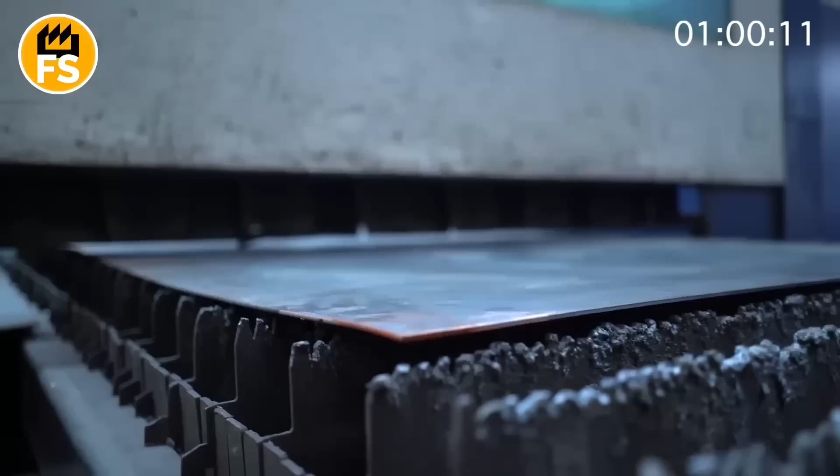Imagine this. Every year, the world produces over 100,000 tons of titanium, a metal that has become a true symbol of innovation and strength in aviation, space, and energy. It's from this metal that the story of creating ultralight and super strong alloys begins, used for manufacturing the most critical parts of airplanes, rockets, and even geothermal equipment.

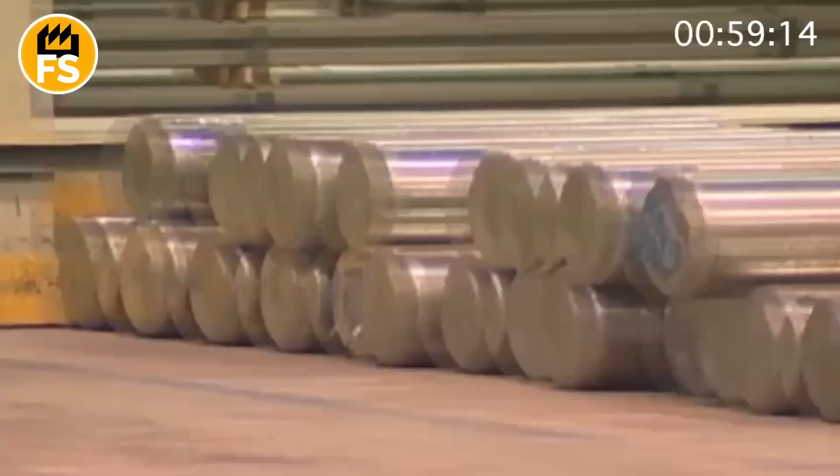In America, where titanium production technologies have reached the highest level, this metal has become indispensable in creating the future, combining lightness with extraordinary strength. Next, I'll tell you how titanium is born, from raw material to a high-tech material that is changing the world.

The history of titanium production begins at the end of the 18th century, when in 1791, a British clergyman and amateur mineralogist, William Gregor, discovered a new metal in the mineral ilmenite, which is now the main source of titanium. Initially, this metal was called menachanite, but later, in 1795, the German chemist Martin Klaproth rediscovered the element in the mineral rutile and named it titanium, in honor of the mythical Titans, giants of ancient Greek mythology.

However, pure metal was first successfully obtained only in 1825 by the Swedish chemist Berzelius, although at that time it was contaminated with impurities and practically unsuitable for industrial use. The first attempts at industrial production of titanium began only in the 20th century.

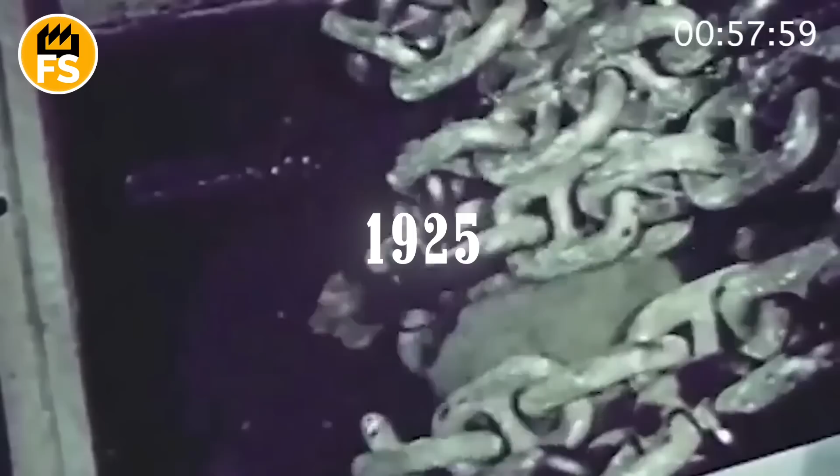In 1910, the American chemist Matthew Hunter obtained a small amount of pure titanium, and a real breakthrough occurred in 1925 when Dutch scientists Van Arkel and de Boer developed a method for obtaining high-purity titanium, which opened the way for its widespread application. From the mid-20th century, titanium production developed intensively, especially in the United States, where the metal became indispensable in aviation, the space industry, and the military industry.

The production of titanium begins with the extraction of titanium-bearing raw materials, mainly the minerals ilmenite and rutile, which contain titanium oxides. These ores are found in the form of placer or primary deposits and are widely distributed throughout the world, particularly in Australia, Canada, China, Norway, and South Africa. After extraction, the ore undergoes complex multi-stage processing.

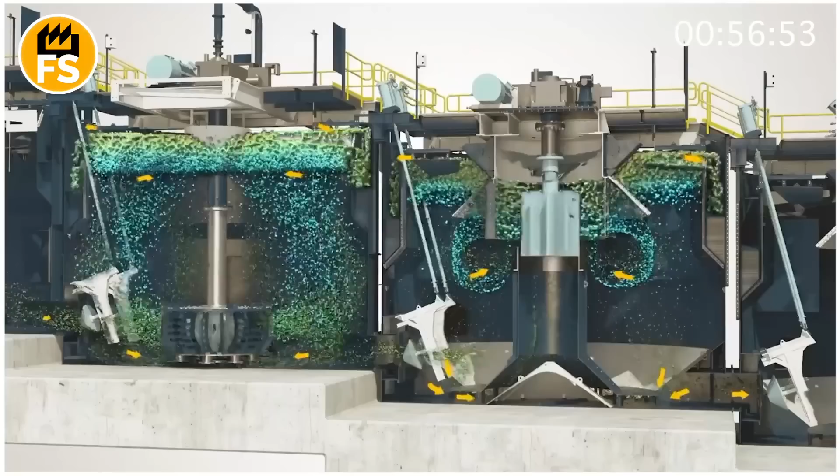First, it is enriched, separating the titanium minerals from the gangue, obtaining ilmenite or rutile concentrates. Then, the concentrates are subjected to chlorination, which results in the formation of titanium tetrachloride, a volatile substance that is purified by distillation. This process allows for the removal of impurities and the production of a high-purity intermediate product.

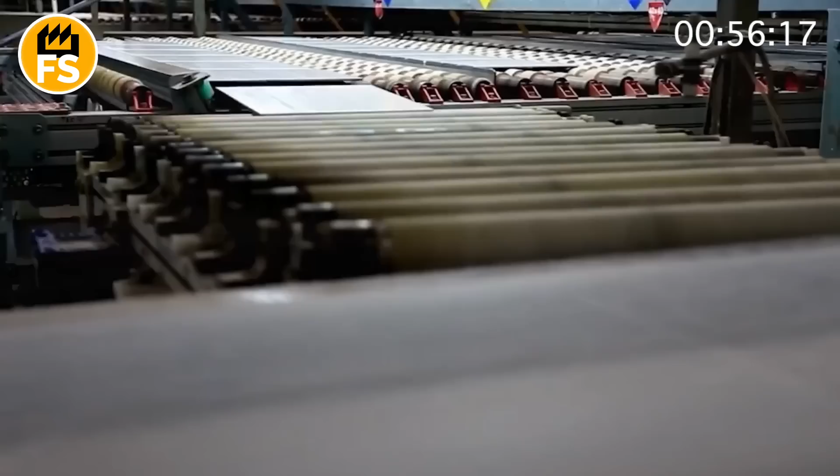Next, titanium tetrachloride is reduced with magnesium or sodium in special reactors at a high temperature in an inert atmosphere, producing spongy titanium, a porous metal powder. This spongy titanium is then subjected to pressing, melting, and casting to obtain ingots or blanks for further processing. The production of titanium is energy-intensive and expensive due to the complexity of technological processes and the need to work in high-purity conditions.

The main industrial method for obtaining titanium is the Kroll process, which remains the standard in the world. It includes chlorination of titanium ore, purification of titanium tetrachloride, and its reduction with a metal, which makes it possible to obtain high-quality metal for aviation, space technology, medicine, and other industries.

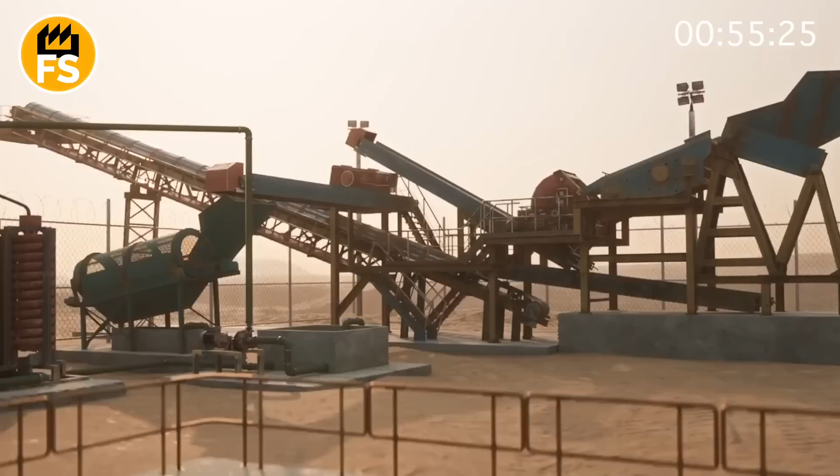Thus, the production of titanium begins with the extraction of ilmenite and rutile, goes through complex chemical reactions and physical processing to transform natural minerals into a high-tech metal that combines lightness, strength, and corrosion resistance. The initial stages of titanium production are based on a complex multi-stage technological process that begins with the extraction and preparation of titanium-bearing raw materials, primarily ilmenite and rutile.

These minerals contain titanium oxides, which must be converted into chemically pure titanium tetrachloride. For this, concentrates of titanium ores are subjected to chlorination in fluidized bed reactors at a temperature of 1,800 degrees Fahrenheit, where carbon and gaseous chlorine react with the raw material, forming titanium tetrachloride and carbon monoxide. This tetrachloride contains impurities of other metals, which are removed by distillation, obtaining high-purity technical titanium tetrachloride.

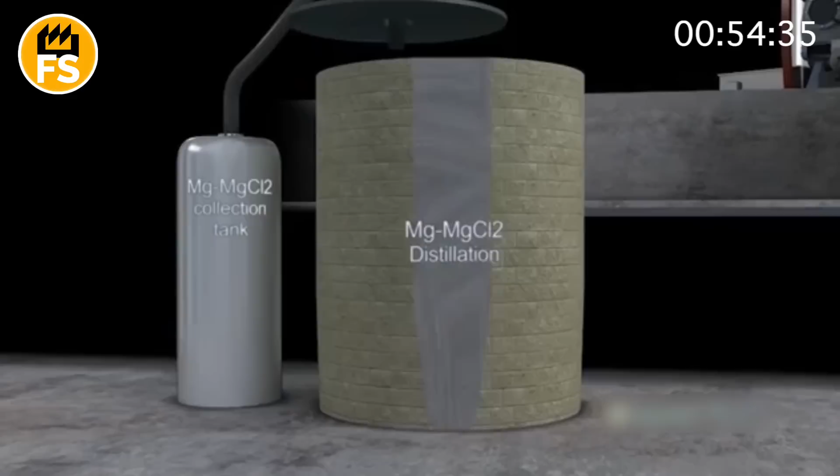The next key stage is the reduction of titanium tetrachloride to metallic titanium. The most common industrial method is the Kroll process, in which titanium tetrachloride reacts with magnesium in a vacuum chamber at a high temperature. As a result, spongy titanium is formed, a porous metal powder that contains impurities of magnesium and magnesium chlorides. This reaction mass is subjected to vacuum distillation to remove impurities, after which the spongy titanium is pressed and remelted into solid ingots or slabs.

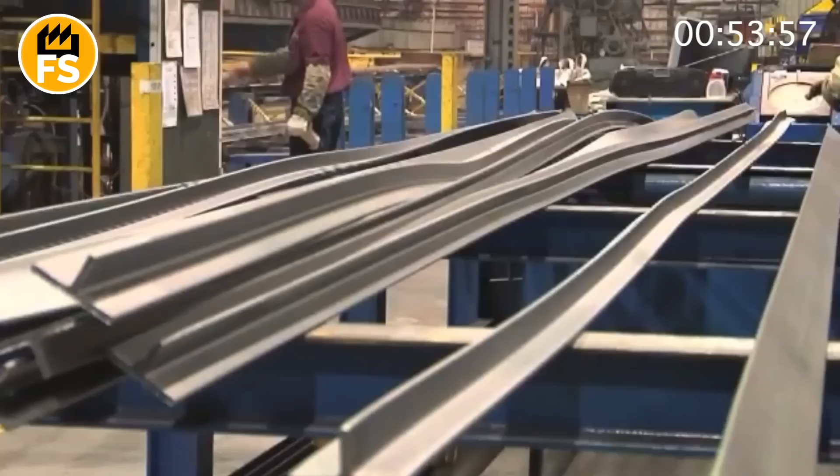The resulting titanium ingots are then used for the production of alloys, rolled products, sheets, and complex parts. The entire process requires strict control of purity, temperature regimes, and safety, as titanium actively reacts with oxygen and nitrogen when heated.

Just look at how incredible it is. A porous, light, and seemingly fluffy mass of metal. This is spongy titanium. It looks nothing like a regular metal bar, but rather like a piece of metal sponge or foam, only made of titanium. But this fluffy material is the first step towards creating strong and reliable titanium ingots, which are then used in aviation, medicine, and other high-tech industries.

First of all, titanium ingots can be used to create titanium alloys, mixtures of titanium with other metals that improve its properties. To obtain an alloy, alloying elements are added to molten titanium, most often aluminum, vanadium, molybdenum, iron, or niobium. These impurities change the metal's structure, increase its strength, heat resistance, corrosion resistance, and improve its processability.

The production of alloys usually takes place in vacuum arc furnaces, where the metal is melted at high temperatures in a protective atmosphere to avoid oxidation. To achieve a homogeneous composition, the alloy is remelted several times, and after that, it is cooled and prepared for further processing.

The next stage is rolling. Ingots or slabs of titanium and titanium alloys are heated to a certain temperature to make the metal more plastic, and passed through special rolls. Rolling allows for reducing the thickness of the metal, giving it the required shape and size, as well as improving its structure and mechanical properties.

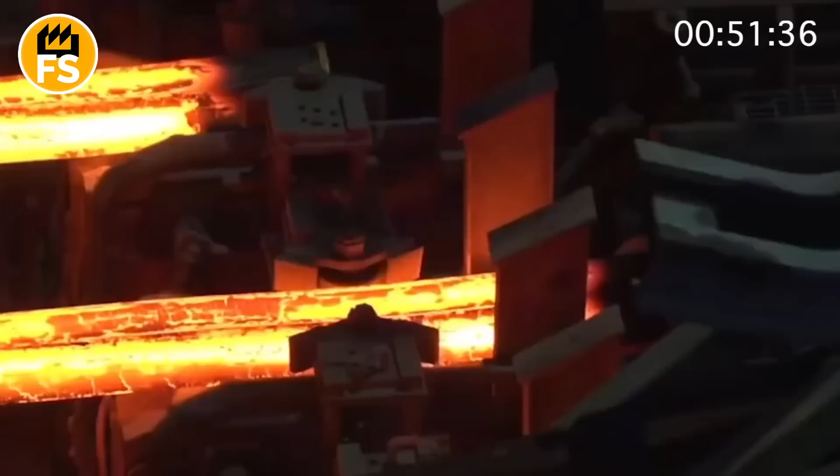As a result, various types of rolled products are obtained: strips, ribbons, wire, and bars. Rolling can be hot or cold, depending on the requirements for the final product. Sheet metal is made from rolled products, thin, flat blanks that are widely used in construction, aviation, medicine, and other industries. Titanium sheets are characterized by high strength and corrosion resistance, and are also easily subjected to further processing: cutting, bending, and stamping. The production of sheets requires precise control of thickness and surface quality, so after rolling, they are often subjected to additional processing, such as polishing or anodizing.

To create complex parts, various methods of processing titanium and titanium alloys are used. These can be mechanical milling, turning, grinding, as well as modern technologies such as additive manufacturing using laser powder bed fusion. Additive technologies allow for the creation of parts with complex geometry that are impossible to produce using traditional methods. This is especially important for the aviation and medical industries, where lightweight, strong, and precise components are needed.

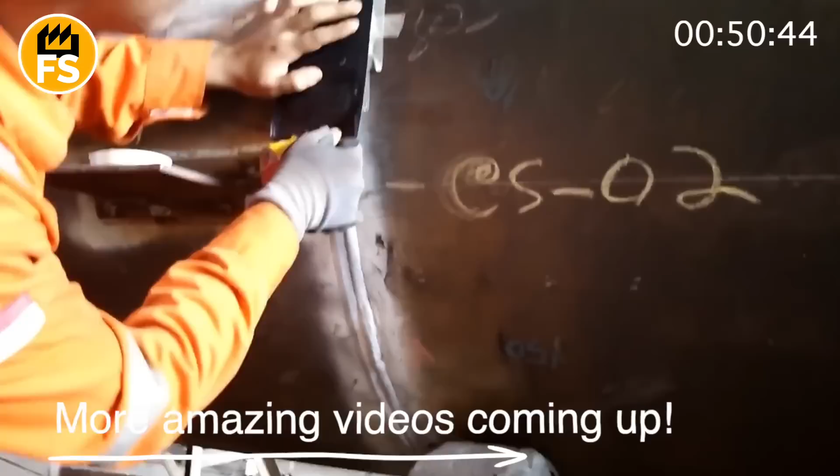In addition, to improve the performance characteristics, titanium products can be subjected to heat treatment: annealing, quenching, or aging. These processes change the internal structure of the metal, improving its strength, hardness, and fatigue resistance. In aviation, titanium makes up 15% of the weight of a modern passenger aircraft, which significantly reduces its overall weight and increases fuel efficiency. In the medical field, about 70% of implants, such as artificial joints and dental prostheses, are made from titanium or its alloys due to their biocompatibility and durability.

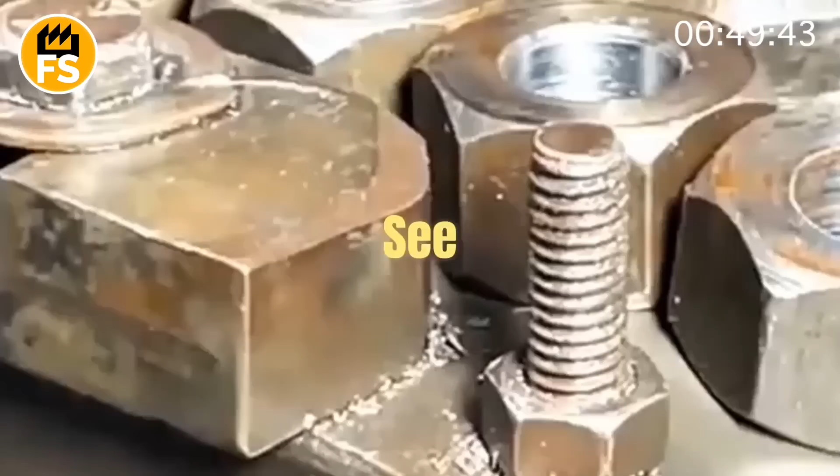A factory for the mass production of bolts and nuts is a high-tech enterprise where metal is transformed into indispensable fasteners used in construction, mechanical engineering, automotive manufacturing, and many other industries. The production of bolts and nuts is a complex, multi-stage process that combines mechanical processing, stamping, heat treatment, quality control, and packaging.

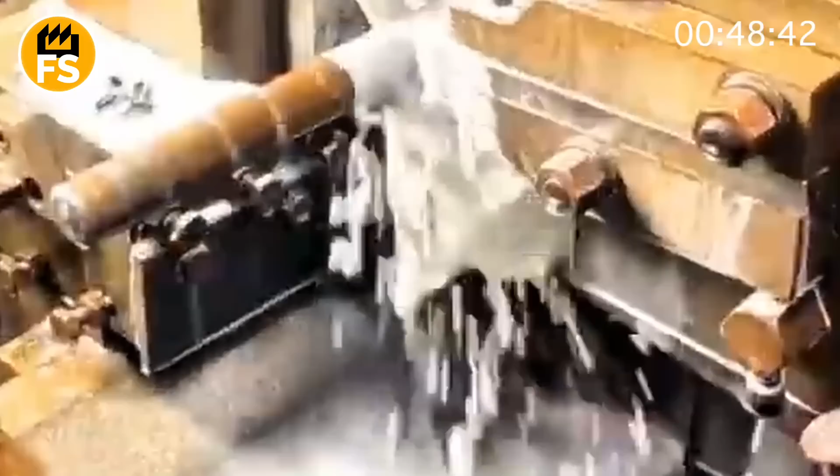The first stage is raw material preparation. High-quality steel wire rod, or bar stock, is used for making bolts and nuts, which undergoes cleaning from rust and contaminants. The most common method is chemical cleaning, specifically pickling in acid solutions, for example, in sulfuric or hydrochloric acid. This process dissolves scale and rust, leaving the metal surface clean and ready for further processing. After acid pickling, the blanks are thoroughly rinsed in fresh water to remove acid residues and then dried.

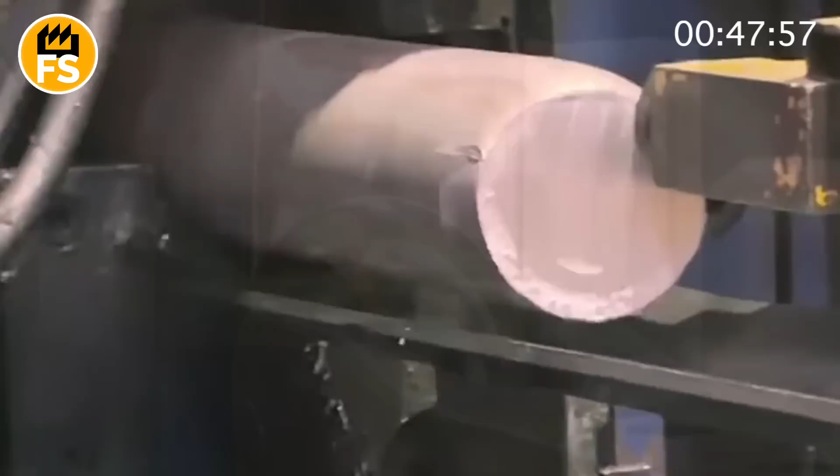For additional cleaning and removal of mechanical contaminants, sandblasting or mechanical grinding is used. Sometimes electrochemical cleaning is also used, which simultaneously evens out the surface and improves corrosion resistance. In large-scale productions, combined cleaning lines are often used, where the metal passes through several stages: mechanical removal of contaminants, chemical pickling, rinsing, and drying. To control the quality of cleaning, visual inspection and special devices that determine the level of surface cleanliness are used. After this, the metal is coated with a protective layer that prevents corrosion during storage and processing.

The main technologies for making bolts are cold heading and turning. Cold heading is a process in which metal blanks are formed under high pressure without heating. The blank passes through a sequence of press dies that give it the shape of a bolt. First, a round base is formed.

Then a head is gradually created, most often hexagonal, which allows the bolt to be tightened with a wrench. Stamping allows for producing bolts with high precision and strength, and also reduces material waste. After forming the head and body of the bolt, the next stage is thread cutting.

The thread is applied by the cold rolling method, where the blank passes between special rollers that form the thread turns without removing metal. This method ensures high thread strength and product durability. In production, speeds of up to 300 bolts per minute can be achieved.

For the production of nuts, hot forging is used. Steel blanks are heated to a temperature of 1,200 degrees Celsius to make the metal plastic, and then under a press, the hexagonal shape of the nut is formed. After this, a hole is punched in the nuts, and an internal thread is cut on special thread cutting machines. Nuts also undergo heat treatment to increase strength and wear resistance.

Heat treatment is an important production stage, including quenching and tempering. Quenching consists of rapidly cooling heated products, which makes the steel hard but brittle. Tempering is the subsequent heating to a moderate temperature, which reduces brittleness while maintaining strength. These processes provide the required strength class for bolts and nuts.

After heat treatment, bolts and nuts undergo thorough quality control. Samples are checked for compliance with dimensions, strength, thread accuracy, and appearance. Micrometers, calipers, and special devices for checking threads are used for measurement. Products that do not meet the standards are rejected or sent for rework.

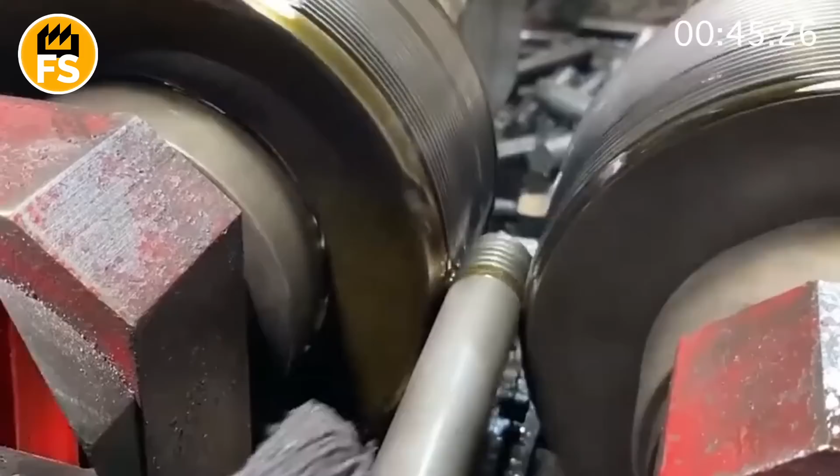To protect against corrosion, bolts and nuts are often coated with anti-corrosion layers, zinc plating, painting, or the application of special coatings. This extends the service life of the products, especially in harsh climatic conditions. Finished bolts and nuts are sorted by size and strength class, packaged in industrial containers, and prepared for shipment. Modern factories are equipped with automated lines that ensure high productivity, hundreds of thousands of products per day.

First, the products are transported along conveyors to automatic sorting machines, which use optical sensors and calipers to determine the size and quality of each bolt or nut. Non-compliant or damaged parts are rejected and sent for rework or disposal. This stage ensures that only products that meet the standards go to the packaging line.

Next, the bolts and nuts go to dispensers that accurately measure the required number of products for each package. These can be small plastic bags, cardboard boxes, or special containers, depending on the customer's requirements and the product's purpose. The packaging is often labeled with information about the size, strength class, manufacturer, and production date.

In some cases, especially for large orders, packaging is done in industrial bags or large containers that facilitate transportation and storage. It is important that the entire process is controlled by automatic systems that ensure the packaging is airtight and protects the products from moisture, dust, and mechanical damage.

Although most operations are automated, at some stages, especially when forming special kits or non-standard orders, manual labor may be used. Workers control the quality of packaging, assemble sets of bolts and nuts, place them in boxes, and prepare them for shipment. This approach allows for taking into account individual customer wishes and ensuring maximum accuracy.

After packaging, the finished products undergo a final control stage, checking the labeling and integrity of the packaging. Then the products are sorted in the warehouse by orders and prepared for shipment. In addition to standard bolts and nuts, many enterprises manufacture non-standard products according to individual customer drawings. This allows for meeting the needs of specialized industries, for example, aviation, mechanical engineering, or construction.

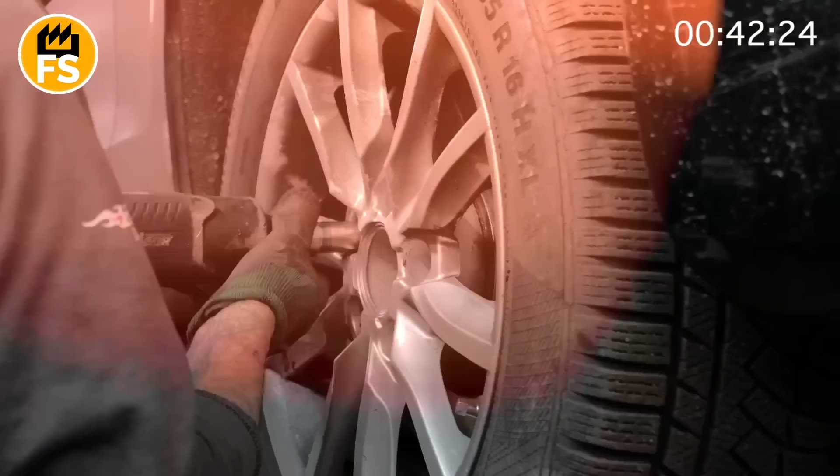The global market for fasteners, including bolts and nuts, is showing stable growth, driven by several key factors. First, the development of construction, the growth of infrastructure projects, the construction of residential complexes, bridges, roads, and commercial facilities stimulates the demand for metal fasteners. Investments in infrastructure modernization in many countries, especially in Asia, Europe, and North America, directly affect the increase in the production of bolts and nuts, as they are the basis of reliable structures.

Second, the growth of mechanical engineering and automotive manufacturing supports the demand for high-quality fasteners. The automotive industry is actively implementing new technologies and materials, which requires precise and strong bolts and nuts to ensure the safety and durability of vehicles.

In particular, in Europe, an increase in car production of more than 2% is expected in 2025, which stimulates the demand for metal products, including fasteners. Another important factor is the technological modernization of the metallurgical industry, which allows for the production of higher quality and specialized products. The introduction of digital technologies, automation, and new processing methods increases the competitiveness of manufacturers and expands opportunities to meet the growing needs of the market.

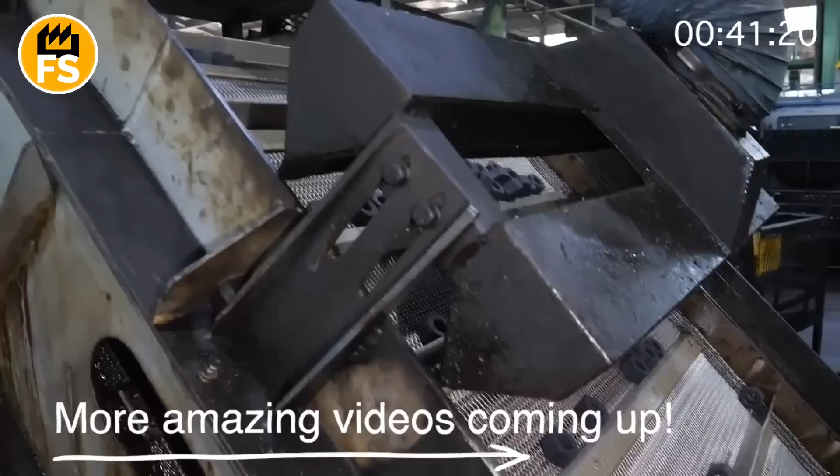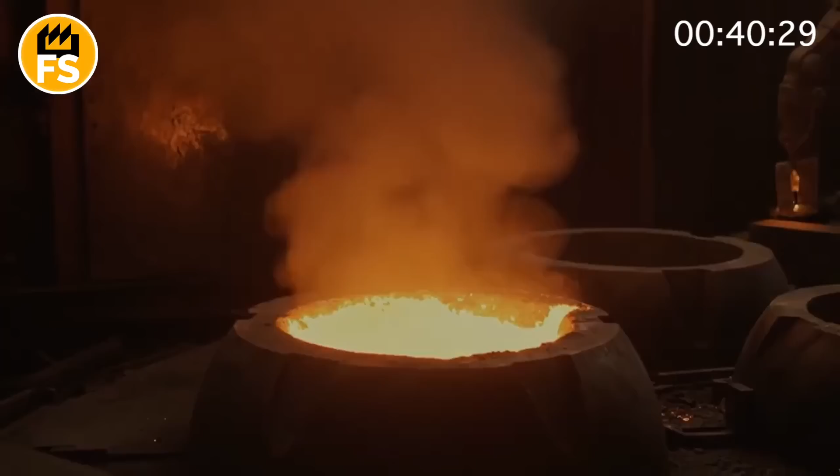Every hour worldwide, there are dozens of nuclear reactions, but only a few know that at the heart of every atomic bomb is a material capable of destroying a city in seconds. This isn't just a weapon, it's a miniature star, created by human hands. You will learn how ordinary uranium gives birth to an explosion with the force of thousands of suns, why the sand in New Mexico turned to glass, and what happened to an island that no longer exists. And most importantly, what secret is hidden inside a nuclear warhead? Watch until the end, because the finale will change your perception of the modern world.

In ancient times, when the world was just learning to hear the voice of the atom, a few curious minds peered into the invisible, into the heart of matter. Those were the years when science was fumbling in the dark, but with great aspiration. German chemist Otto Hahn, along with Fritz Strassmann, like alchemists of a new world, discovered uranium can be split. It was like ice cracking on a river, under which a giant was sleeping.

While Europe was preparing for war, a group of people, later to be called the Lords of the Atomic Flame, secretly gathered across the ocean. The Manhattan Project began in the New Mexico desert. Ordinary physicists, Oppenheimer, Fermi, Teller, became the creators of the greatest force humanity had ever seen. In the summer of 1945, under the dawn clouds, the first nuclear bomb exploded. The sand turned to glass, the sky to fire. And amidst the complete silence, one scientist whispered, "Now I am become death, the destroyer of worlds."

But the story didn't end there. A few days later, Hiroshima and Nagasaki became pages of sorrow. And when the world thought it had seen everything, the USSR responded. Under the leadership of Igor Kurchatov, the first Soviet atomic bomb exploded in 1949, and a decade later, the Tsar Bomba. Its power could destroy a city the size of Paris.

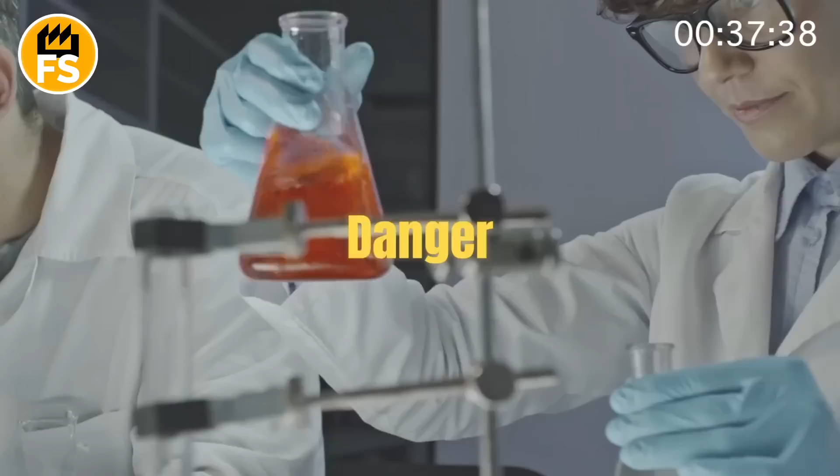Nuclear research gave birth to new fields: nuclear energy, reactors on submarines, medical diagnostics. Even space projects received a boost thanks to the understanding of the atom. To create the most terrible, we learned to comprehend the most complex. Yes, nuclear weapons are a danger, but they are also a mirror of human wisdom. We created something super powerful and did not use it on a massive scale. This is a story about a force that we decided to restrain. About a science that taught us not to dominate, but to coexist.

In the depths of laboratories, where the light of lamps dimly illuminates blueprints, the journey to creating a nuclear bomb begins. This is not just an assembly of metal. It is the alchemy of modernity, where every gram of substance has the power of 1,000 suns. It all starts with uranium or plutonium, isotopes capable of sustaining a chain reaction. But uranium in nature is mostly uranium-238, which is not suitable, so it is enriched. The 235 isotope is separated using centrifuges, where gaseous uranium spins at insane speeds.

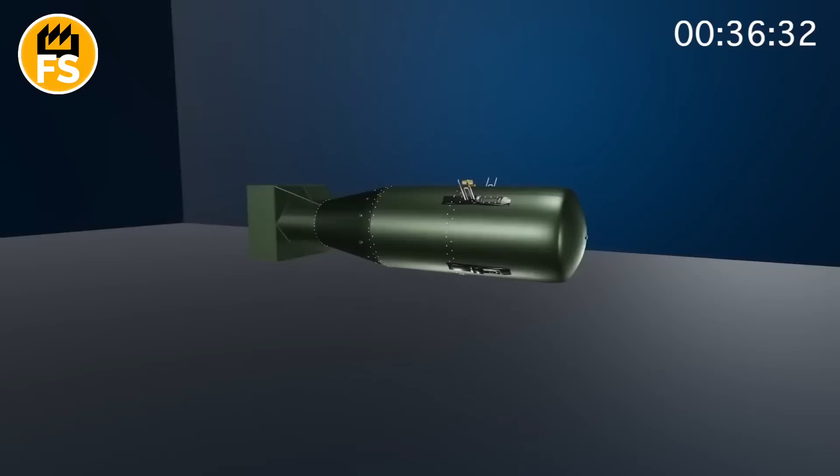Plutonium is artificial. It is obtained in nuclear reactors, where uranium absorbs neutrons and turns into the plutonium needed for a nuclear bomb. The external appearance of a nuclear bomb often resembles a classic aerial bomb. A streamlined metal body designed for stable descent from a great height.

In a huge hangar, where the walls ring with the echo of metal, the air smells of hot steel and lubricant. Here begins the birth of the shell that must contain the heart of the atomic explosion. From the red-hot maw of an industrial furnace comes a stream of metal, a special steel reinforced with nickel, chromium, and manganese. Its temperature is over 1,000 degrees Celsius. The summer sun pales in comparison to this fire.

Masters, in protective suits with transparent shields, watch the forming. On presses with a force of hundreds of tons, a steel sheet is bent into a streamlined shape. Before their eyes, an elongated body is born, resembling a drop of water, frozen under the pressure of the heavens. Next, mechanical arms mill internal partitions. Cut holes for tail stabilizers and locks. Every millimeter is the result of careful calculation, because the balance during the fall depends on it.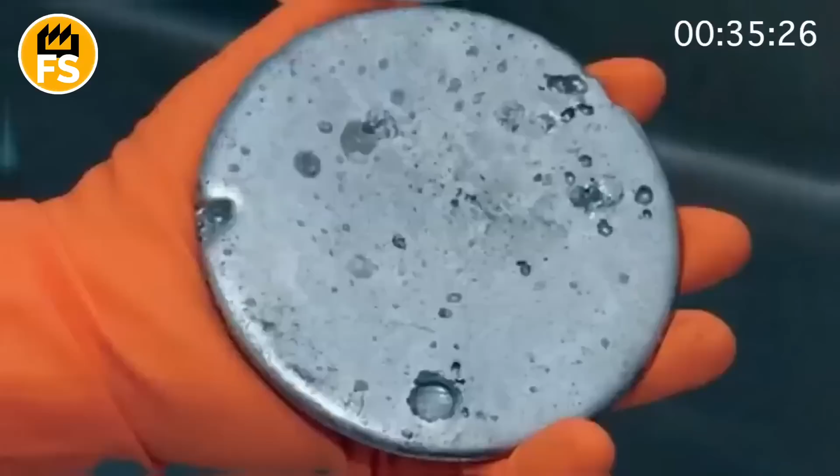After this, the body undergoes a strengthening ritual. Immersion in an anti-corrosion bath, treatment with a polymer coating, and a matte paint finish. The color is dark green, similar to a military shadow on a slope of pines. And finally, testing. It is dropped from a height, struck with hammers, rotated in a wind tunnel.

A quiet laboratory, semi-darkness, a light smell of ozone. Something heavy hangs in the air. Before you lies an open nuclear bomb, its metal walls removed, and its insides, like an organism, lie exposed. There is nothing superfluous here. No shine, no decorations. Only function, only explosion.

At the center, a smooth, perfect sphere. It looks like a dull meteorite. This is the nuclear charge. Plutonium-239, cold and deadly, or uranium-235, heavy as a planet in the palm of your hand. Its shape is mathematical perfection, polished to the micron. Around this sphere is a whole symphony of pressure.

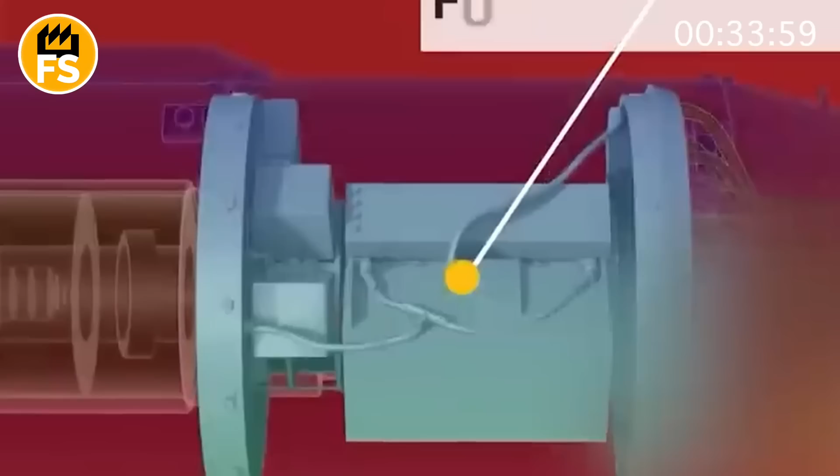Composite explosives, layer by layer, resemble a flower, folded inside out. Their task is not just to explode, but to make the explosion happen inside. Like palms squeezing to the limit, these explosive lenses must create an implosion, a uniform, ruthless compression that will make the substance supercritical. If even 1 microsecond is delayed, the entire structure will become a meaningless pile of metal.

And in the very heart of this implosion orchestra, the initiator. A small device waiting for the moment to release the first neutrons. Polonium and beryllium interact, creating a tiny storm capable of starting the irreversible. It is from this that the chain reaction will begin. A match to an atomic forest.

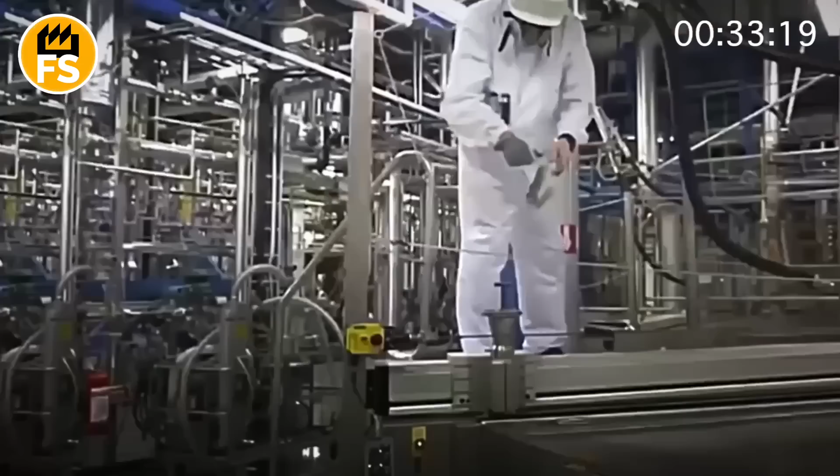Then, a layer of tamper. Heavy as a shadow, it envelops the heart of the bomb, not to protect, but to contain. Uranium-238 or tungsten are not active, but extremely important. Their task is to delay the neutrons, to make them return, like an echo in a cave. The duration of the explosion, its power, its apex, all depend on this.

In the tail of the body, the brain. Automation, electronics, wires and sensors. Barometers await altitude. Radars watch the ground. Batteries slumber, ready to awaken. Here it is decided when everything must happen. Over a city, in the air, after the fall. Without this nervous system, the explosion would be an accident. But here it is, a calculation.

If you look at the entire structure in cross-section, it resembles the layers of a planet, the sections of an encyclopedia of power. The outer casing, smooth and cold, the layer of explosives, mathematically arranged, the tamper, an invisible guardian, the core, like the seed of the future, and in the very center, a spark that sleeps until it is awakened. In 62 years, 2,065 nuclear explosions have occurred in the world.

5,224 is not the number of nuclear explosions, but an approximate estimate of the total US arsenal, including active, reserve, and dismantled warheads. But the number of nuclear tests that the US conducted from 1945 to 1992 is 1,054 explosions, and each of them is a separate page in the history of power, fear, and science.

The first explosion, Trinity, on July 16, 1945, in the New Mexico desert. This was the beginning of an era when the energy of the atom became a weapon. It was followed by Hiroshima and Nagasaki, the only instances of the combat use of nuclear weapons.

In the following decades, the US tested bombs on the atolls of Eniwetok and Bikini, in Nevada, underground, in the atmosphere, and over water. The explosions had different purposes. Testing new designs, demonstrating power, studying the effects on technology and living organisms. The power varied, from a few kilotons to 15 megatons, as in the Castle Bravo test of 1954.

In 1952, the US conducted the first thermonuclear test, Ivy Mike. This was no longer just a bomb, but a miniature star created by man. The explosion destroyed an entire island. In the 1960s, testing became regular. The US tested warheads for missiles, aerial bombs, and even neutron charges, which had a minimal blast wave but maximum

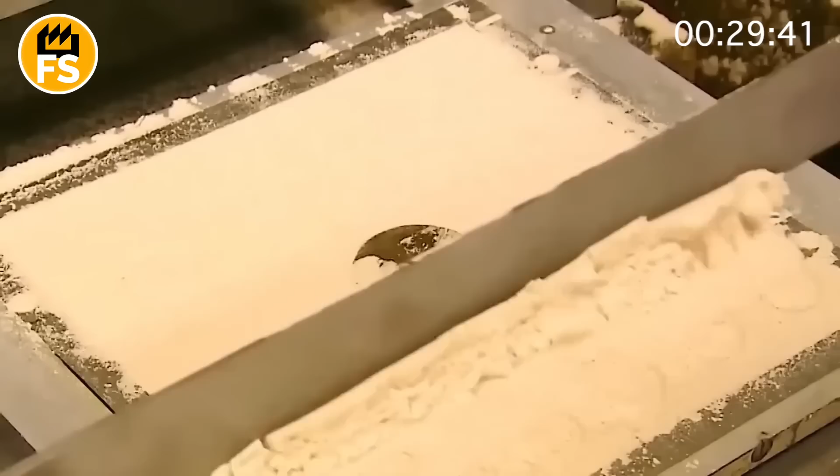Every year, over 50,000 tons of neodymium magnets are produced worldwide. Without them, electric cars, smartphones, and even rockets wouldn't work. But few people know that it all begins with dirty ore, mined at depths of hundreds of feet. To turn it into a super powerful magnet, it must go through more than 10 complex stages, where every second and every degree matters. There's a moment where the material explodes from within. Why? If you watch until the end, you'll discover a technological secret that even the world's largest manufacturers keep hidden.

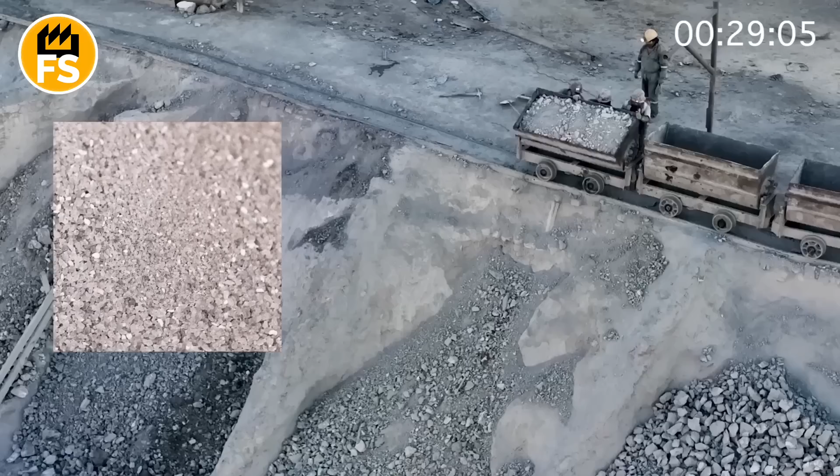The mining and primary processing of rare earth ores are a key stage in the production of neodymium magnets, as this is where the foundation for obtaining the necessary components is laid. This process begins with the large-scale mining of ore containing rare earth elements, which include neodymium. In the first stage, the ore is extracted from the Earth's crust using various mining methods. This can be either open-pit mining or underground mining, depending on the depth and type of deposit.

After extraction, large pieces of ore are delivered to crushing plants. At the crushing plants, the ore undergoes primary crushing. Large boulders of ore pass through a series of crushers that gradually reduce their size to smaller fractions. This is necessary for further effective processing and extraction of valuable components. The crushed ore may then be fed to mills, where further fine grinding takes place to a powder or pulp state, consisting of fine ore particles suspended in water.

The next critically important stage is ore beneficiation, the goal of which is to separate the rare earth minerals from the gangue. This process can include various methods. One of the most common methods is froth flotation, where the crushed ore is mixed with water and special reagents. These reagents selectively attach to the surface of the rare earth minerals, making them water repellent. Air is bubbled through the mixture, creating bubbles to which the hydrophobic minerals adhere and rise to the surface, forming a foam that is then collected.

Heavier particles settle faster, allowing them to be separated from lighter ones. Some rare earth minerals have magnetic properties, which allows them to be separated from non-magnetic components using magnetic separators. After beneficiation, a concentrate is obtained, which contains a much higher concentration of rare earth elements. However, this concentrate is still not pure metal.

It requires further chemical processing, which usually includes dissolving valuable components with acids or alkalis, precipitation, solvent extraction, and ion exchange chromatography. These processes allow for the individual separation of each rare earth element and its purification to a high degree. For example, neodymium is separated from other rare earth elements such as praseodymium or samarium.

The final result of this complex chain of processes is obtaining high-purity neodymium oxide, which is then reduced to metallic neodymium. This metallic neodymium, in the form of granules or ingots, is ready for the next stage, alloying with other components to create powerful neodymium magnets. The entire process requires strict quality control and significant energy expenditure, but is absolutely necessary for obtaining the raw material for the production of these strategically important materials.

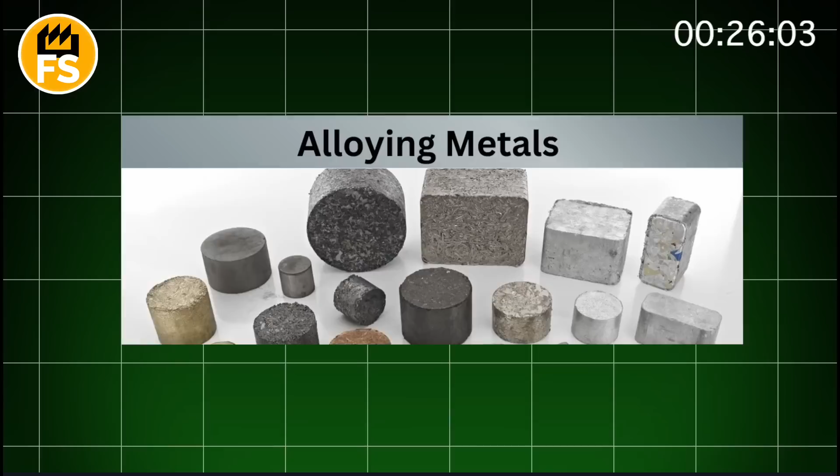After the careful extraction and purification of rare earth elements, particularly neodymium, comes one of the most important stages in the production of high-performance neodymium magnets: alloying. This process requires extreme precision and control, as the final microstructure and, consequently, the magnetic properties of the finished material depend on it.

The purified metals, neodymium, iron, and boron, are carefully weighed in strict proportions. These three elements are the main components of the alloy that provides unique magnetic characteristics. In addition to them, small amounts of other elements, such as dysprosium, terbium, cobalt, or copper, may be added to the alloy. These additives are introduced to achieve specific properties, for example, to increase the magnet's thermal stability, improve resistance to demagnetization, or modify the material's brittleness.

The exact composition of the alloy is a trade secret of many manufacturers and varies depending on the desired final characteristics of the magnet. The weighed components are placed in a specialized vacuum induction furnace. The use of a vacuum is critically important, as it prevents the oxidation of rare earth metals and other components at high temperatures. Oxidation would lead to the formation of undesirable phases, which would worsen the material's magnetic properties.

Induction heating ensures rapid and uniform melting of all components, creating a homogeneous melt. The melting temperature in such a furnace can reach over 2,700 degrees Fahrenheit. After achieving complete melting and homogenization of the alloy, the stage of rapid cooling begins, known as the strip casting method. This is a key moment for forming the optimal microstructure.

The molten metal is poured in a thin stream onto a rapidly rotating cooled drum. Contact with the cold surface of the drum leads to extremely rapid cooling of the melt at a rate of up to millions of degrees per second. Such extremely rapid cooling prevents the formation of large crystalline grains and allows for the formation of an amorphous or microcrystalline structure.

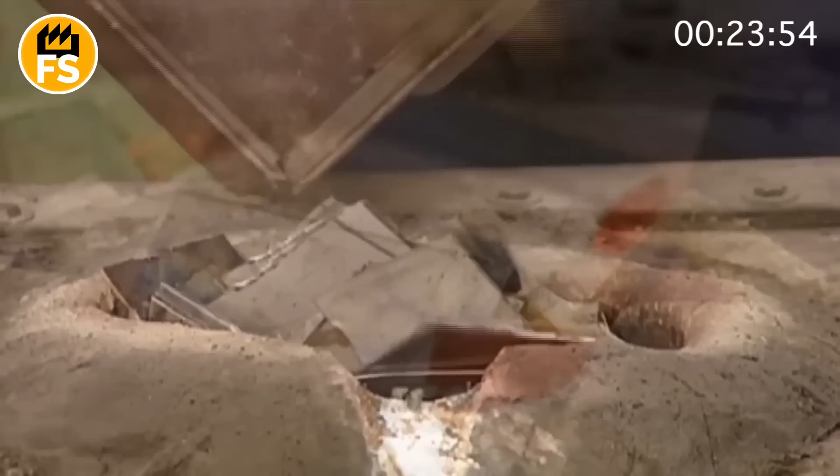Instead of the typical crystalline structures formed during slow cooling, extremely fine grains are formed. This process is also known as rapid solidification, and it is fundamental to achieving high magnetic properties. The resulting material has the form of thin flakes or ribbons that are easily crumbled. This unique microstructure, with very fine, often anisotropic grains, is the key to the high strength of neodymium magnets.

The smaller the grain size, the more difficult it is for magnetic domains to change their orientation, which provides high resistance to external demagnetizing fields. Thus, the alloying and rapid cooling stage is fundamental for forming the magnetic characteristics that will later be fixed in the subsequent stages of production.

After the alloying and rapid cooling stage, when thin flakes or ribbons of the neodymium-iron-boron alloy have been formed, the stage called hydrogen decrepitation begins. This is an innovative and highly effective method used for the primary crushing of the obtained material before further fine milling. The essence of the process lies in the interaction of hydrogen with certain components of the alloy, particularly with neodymium. Neodymium, being a rare earth metal, has a high chemical affinity for hydrogen and is capable of forming hydrides.

When the alloy flakes or ribbons are placed in a controlled environment where they are exposed to gaseous hydrogen, the hydrogen begins to penetrate the material's structure. The penetration of hydrogen atoms into the crystal lattice of neodymium and the formation of hydrides leads to a significant expansion of the volume of the crystalline grains. This expansion creates enormous internal stress within the material.

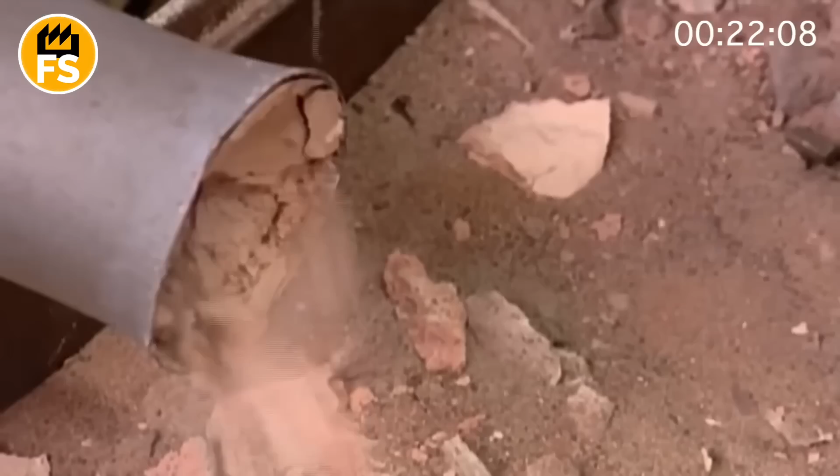Since the alloy is already relatively brittle, these internal stresses lead to the formation of numerous microcracks along the grain boundaries and within them. As a result, the material becomes extremely brittle and literally breaks down into small particles that are much smaller than the original flakes. This process occurs without the use of mechanical grinding, which avoids significant contamination of the material from mill elements and reduces energy costs. In addition, hydrogen decrepitation occurs mainly along the grain boundaries, which ensures the preservation of the magnetic properties of individual grains that were already formed during the rapid cooling stage.

The powder obtained after hydrogen decrepitation is an intermediate link in the production of neodymium magnets. It is not yet fine enough for pressing and sintering, but it already has a much smaller size, which makes the next stage, jet milling, more economically viable and technologically manageable. This stage demonstrates how the chemical properties of elements are used to optimize physical processes in metallurgy.

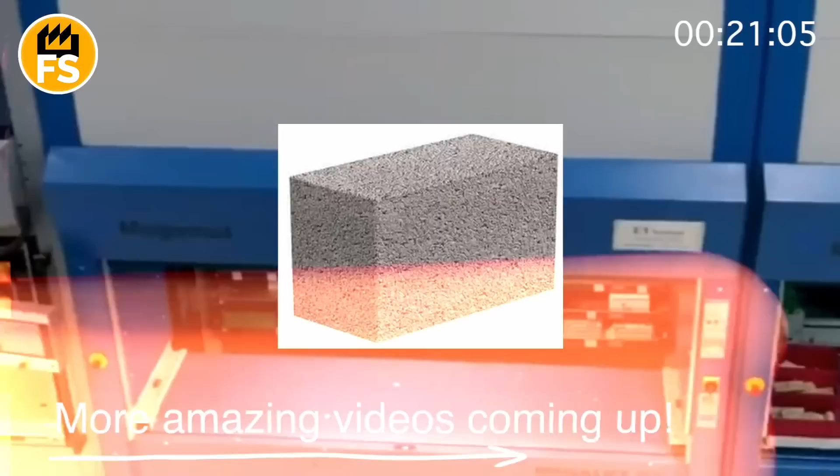The powder is pressed into a solid block in a vacuum under a strong magnetic field. This field orients the grains so that their magnetic domains are aligned in the desired direction. The block is immersed in a cold isostatic press under high pressure to remove residual air gaps.

The pressed block is placed in a furnace at a very high temperature, over 2,000 degrees Fahrenheit, just below the metal's melting point. This process allows the blocks to achieve full density and develop their magnetic and mechanical properties.

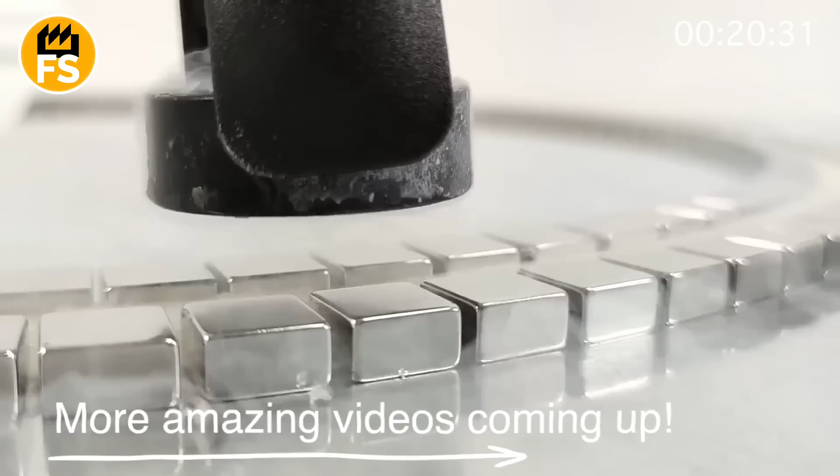After sintering, the blocks are reheat treated at lower temperatures to relieve internal stresses. The resulting magnets are cut and ground to the desired shape. Due to the high cost of the material, waste is minimized. Most neodymium magnets are coated with a protective layer, usually nickel-copper-nickel, to prevent corrosion.

At this stage, the magnets have a preferred direction of magnetization, but are not yet magnetized. They are placed in a fixture that briefly exposes the magnet to a very strong magnetic field. After the field is removed, the magnetic field remains in the magnet.

Every hour, over 3,000 miles of electrical cables are laid worldwide. But few people know that this involves gigantic metal spools, each one an engineering marvel weighing over 20 tons. Their diameter can reach 33 feet, and inside, up to 37 miles of wire capable of transmitting hundreds of thousands of volts. A half-inch error, and everything goes down the drain in losses.

How are these steel giants created with precision down to 1/100th of an inch? And why can't any power transmission line exist without them? Watch, and you'll be amazed.

This story begins with calculations. Before the first bolt touches the steel, a team of engineers dives into mathematical alchemy. Each spool for a high-voltage power transmission line is created for a specific type of cable, so there are no trifles here. Blueprints, models, and calculations come into play.

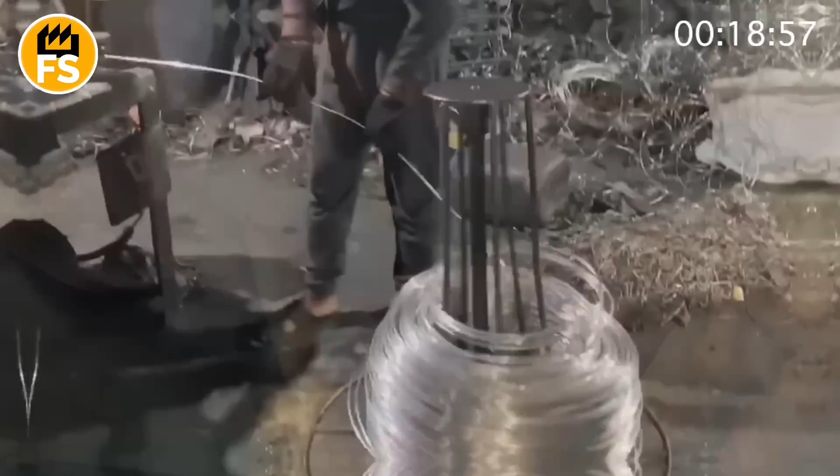It is necessary to consider the outer diameter of the cable, for example, 2 inches. Its weight, which can exceed 3 pounds per foot. Density, number of turns, winding angle, and even the insulation's coefficient of friction. On average, up to 6 miles of cable are wound onto one spool. That's almost 32,000 feet of heavy, multi-insulated wire that, under voltage, can carry hundreds of thousands of volts.

An error of just half an inch in the spool's diameter, and the cable might start coiling incorrectly, shifting, compressing, overheating. In the worst case, it gets damaged even before installation. And that's tens of thousands of dollars in losses before even starting.

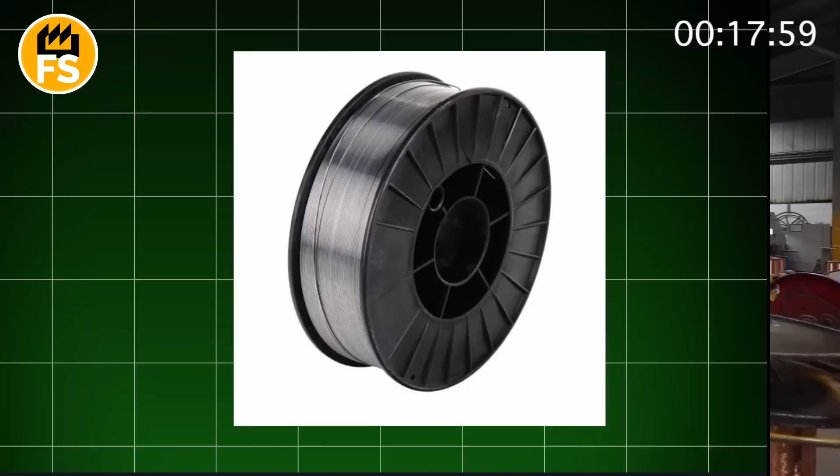Moreover, the core diameter of the spool can reach 5 or 6 feet, and the total diameter of the flanges up to 33 feet. The weight of the structure exceeds 40,000 pounds. That's like 2 large SUVs screwed together and stood upright. And this entire mass has to rotate smoothly, without misalignment or vibrations. Are you impressed? Because I sure am.

To avoid disasters, engineers add a coefficient of material expansion, as metal changes size when heated, consider transport weather conditions, and also the winding geometry, because even too steep a winding angle can damage the cable when it's unwound.

When the drawings are approved, giant workshops come onto the scene, hangars the size of a football field. Here, metal flanges, cores, and frames appear. Most often, the spools are made of steel. It's steel that can withstand the weight of the cable and the loads during transport. For an average spool, more than 2 tons of steel are needed at the laying site.

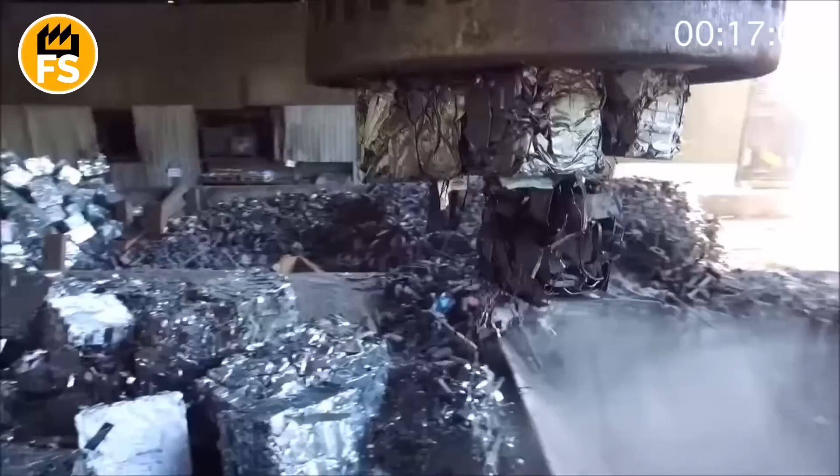So, each giant spool for power transmission lines starts with cold metal, thick steel sheets that arrive at the factory as plates measuring 6 by 12 feet or more. Their thickness ranges from half an inch to 1 inch, and this steel is structural. Strong, tough, capable of withstanding high loads without cracking or deforming.

First, the sheets are fed to plasma or laser cutting machines, which are programmed according to precise drawings. A giant plotter, emitting a hot beam, literally burns complex shapes into the metal. These machines operate with an accuracy of 1/100th of an inch. Such precision isn't for beauty's sake, it's critical.

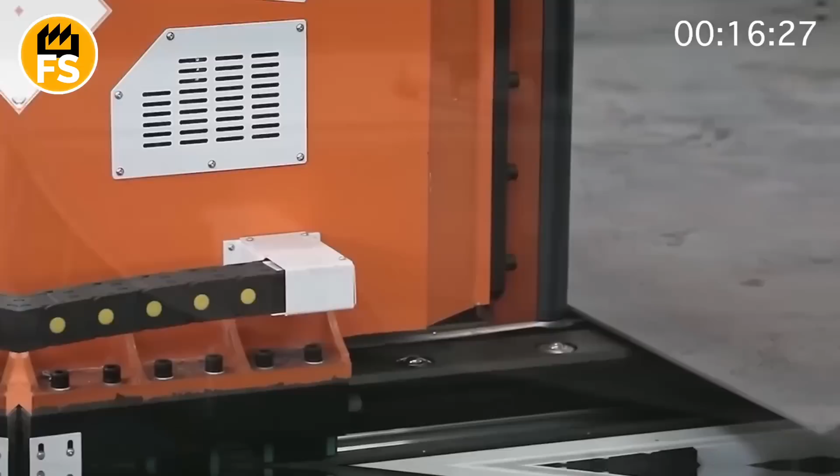Because even the slightest error on one flange can cause the spool to lead the cable off-center during rotation. And that's a risk of misalignment, jamming, and failure during installation. The discs for the flanges are cut in pairs, identical rings 20 to 33 feet in diameter, with holes for connecting bolts. Technical slots and markings for future reinforcing elements are made on the surface right away.

After cutting, they are processed by grinding machines. Burrs are removed, and they are prepared for welding. At the center of the future spool is the core, a large steel pipe that will serve as the drum for winding the cable. Usually, its diameter is from 5 to 8 feet, and its length up to 10 or 16 feet. The pipe is cut from thick rolled stock and reinforced with stiffening ribs inside.

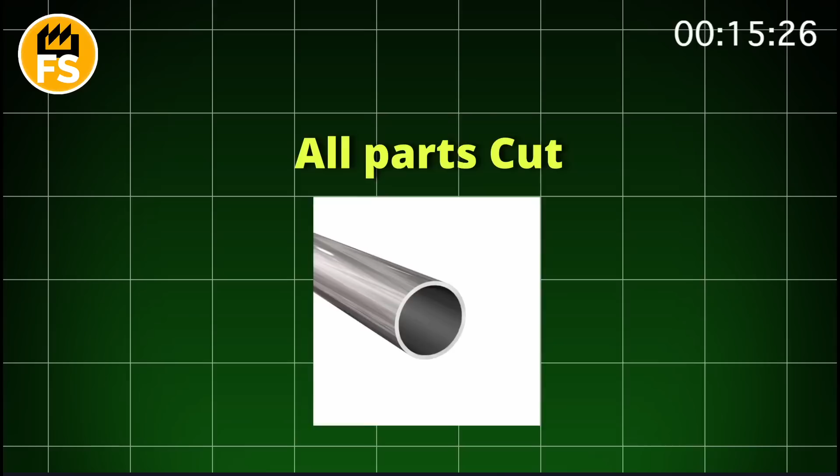These are thick steel strips that form a frame and prevent the pipe from sagging under the weight of the cable. After all the parts of the future spool are cut, the stage where every millimeter matters begins: welding and assembly. Here, metal geometry transitions from 2-dimensional to 3-dimensional.

2 giant flanges are attached to both sides of the core, a steel pipe that will hold tens of thousands of feet of heavy cable. The entire structure must withstand not only its own weight, but also dynamic loads during rotation and transport.

Welding is done manually or automatically, depending on the size and complexity. Most often, submerged arc welding is used, which allows for creating dense, strong seams without voids. The joints are additionally ground, as any protrusion or unevenness can damage the cable during winding.

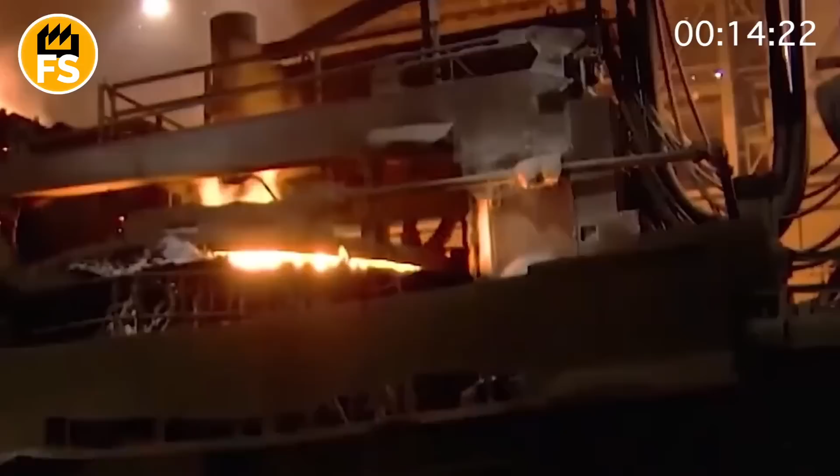Then, reinforcement. Stiffening ribs, which are thick steel plates placed inside the core and at the joints with the flanges, are added to the structure. They prevent deformation under pressure. To fix all the parts, bolts up to 1.5 inches in diameter are used, tightened with special hydraulic torque wrenches. One such bolt can withstand a load of tens of thousands of pounds.

The finished spool is installed on a temporary axle and rotated. Engineers check the balance using a laser level, ensuring that during rotation, no part shifts even 1/4 of an inch. If the structure wobbles, it's ground, adjusted, and sometimes parts of the elements are reassembled. And only after this is the spool considered ready for the final stage: anti-corrosion treatment, painting, and testing.

The finished spool has just been removed from the rotating stand after welding. It's still warm, smells of metal and ozone, and its surface is covered with dark gray spots. That's scale. It looks like a thin crust, similar to coal dust, and remains after the metal comes into contact with high temperature. Along with it, small remnants of oil, dust from grinding, handprints. Painting in this state is a waste of time. The coating won't stick, it will peel off in the first few months.

So first, mechanical cleaning takes place. The workshop buzzes with tools. Workers with stiff brushes on grinding machines go over the joints, flanges, and stiffening ribs. They remove rough irregularities, clean the seams of residual slag. But this is not enough.

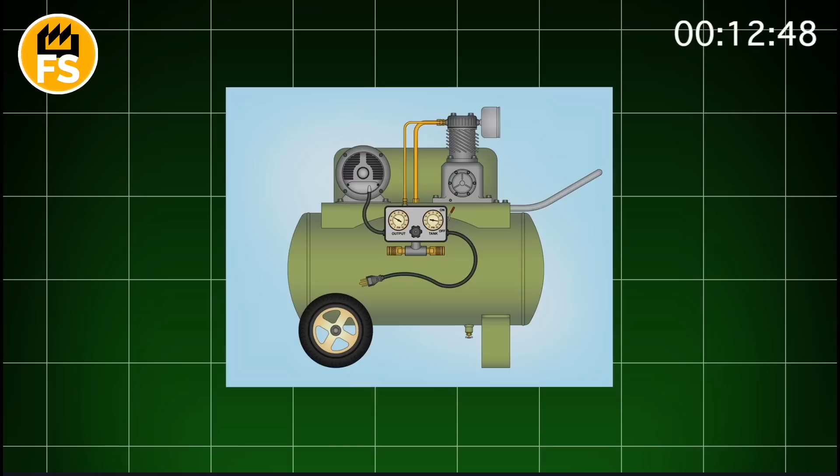Next, a sandblasting unit comes into play. A large chamber, or just a separate section in the workshop. The spool is brought inside on a special platform. Then, the roar of a compressor and a stream of fine abrasive starts hitting the steel surface under high pressure. Sometimes quartz sand, sometimes steel balls. It sounds like a storm of hail hitting tin.

The surface changes before your eyes. Where there was just dark mottling, now there is an even, matte gray metal with a slight roughness. If you run your finger over it, you feel not smooth, but slightly velvety to the touch. This is exactly what's needed, because this micro-roughness significantly improves adhesion with the anti-corrosion primer. In chemistry, this is called the anchor profile effect. When the treatment is complete, the entire surface is blown with air, blowing out residual abrasive from corners and crevices.

This is the perfect moment to apply an anti-corrosion primer, the first protective barrier between the metal and the environment. A worker in a mask and protective suit takes a sprayer with a thick gray liquid, a zinc-rich primer. With each press of the trigger, a thin, even mist comes out of the nozzle, settling on the surface. The zinc in the primer acts as a sacrificial metal. It is the first to react with moisture, saving the steel from corrosion.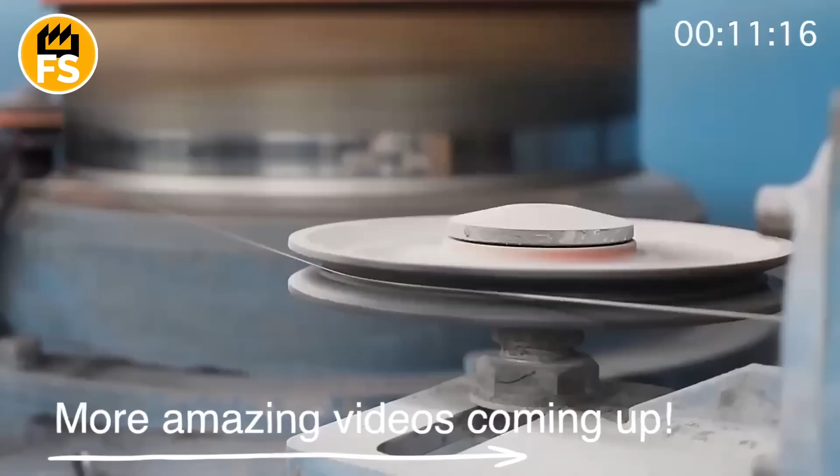After a few minutes, the spool is already covered with a thin, almost invisible layer. It looks a little lighter, as if dusted. In a few hours, this primer will polymerize and form a chemically resistant film that is firmly bonded to the metal. It is this layer that takes the first hit from time, moisture, and temperatures. For export or harsh climatic zones, additional layers may be applied: marine varnish, hydrophobic films, or even heat-resistant coatings that can withstand heating up to 300 degrees Fahrenheit.

When the coating dries, the spool is carefully inspected. Under ultraviolet light, all microcracks, bubbles, or gaps in the layer are visible. If there are doubts, an electric spark test is performed. A special probe glides over the surface, and a spark jumps only where the insulation is compromised. This ensures that every inch of metal is reliably protected and will withstand years of operation in any conditions.

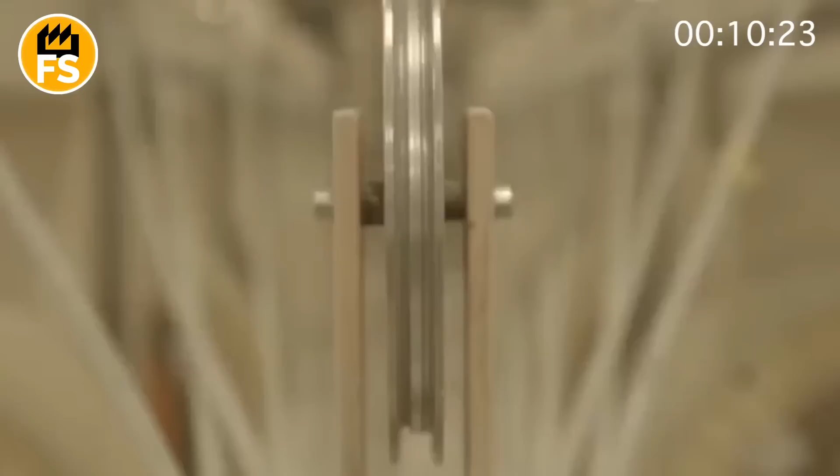Every second globally, over 3 billion gigabytes of data are transmitted. But did you know that all this happens thanks to a thread thinner than a human hair? And that this thread starts with ordinary sand. Not beach sand, but perfectly pure quartz, where there's only one impurity per million parts.

To create fiber optic cable that transmits light at a speed exceeding 300,000 kilometers per second, you have to go through a journey involving chemical vapors, sterile laboratories, a 2,500-degree furnace, and lasers that monitor every microcrack. This process looks more like manufacturing a spaceship than a cable, but it is the foundation of the internet you are using right now.

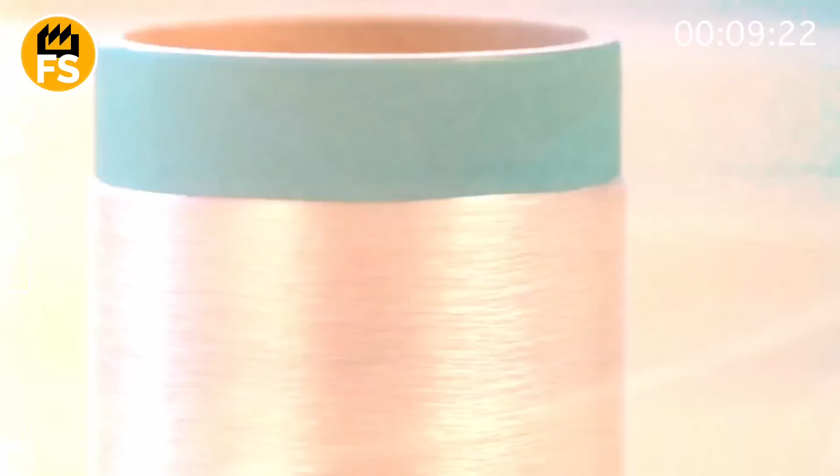To create a thread capable of transmitting light at a speed exceeding 186,000 miles per second, you have to start with sand. But not just any sand, only special, extremely pure quartz sand, where the main substance is silicon dioxide. For fiber optic production, sand with a silica content of over 99.9999% is used, meaning in 1 million parts, there's only 1 part of impurities. Imagine this: in every pound of raw material, no more than a few millionths of an ounce of impurities.

And this is critical, because even 1 billionth of an inch of foreign metal or organic matter can cause light scattering or absorption in the fiber optic cable. And then the signal, which was supposed to travel 60 miles without amplification, simply disappears. Raw material for fiber optic cable isn't just washed or filtered, it's purified at the molecular level.

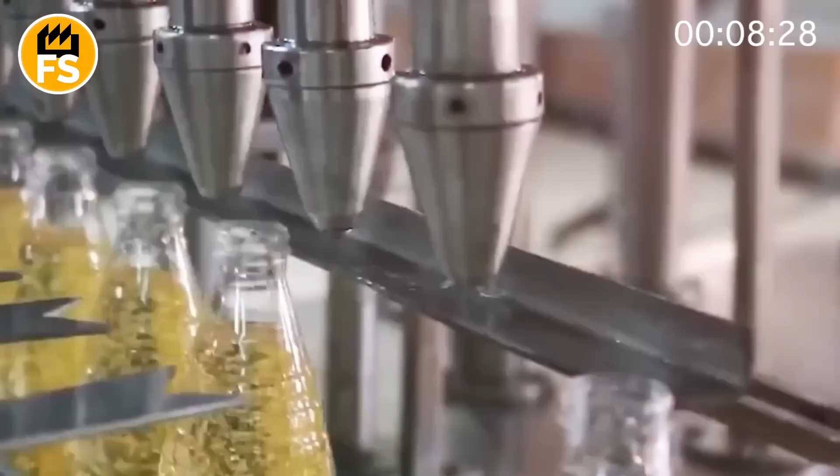Manufacturers often use vapor phase chemistry. Quartz sand is converted into gaseous silicon tetrachloride, which is then distilled, filtered, and deposited as pure vapor. And only then is it converted back into glass. Add to this strict control of temperature, humidity, air currents in clean rooms, and you'll get an idea of how far this is from an ordinary sandy beach.

Production laboratories look more like NASA sterile zones than a glass workshop. And all for the sake of ensuring there's not a single defect in every yard of the future fiber. Because when you're transmitting light over thousands of miles, even one microscratch can cost you signal quality.

A large transparent glass cylinder that will later be melted and drawn into a very thin thread. This is the fiber optic preform. This huge glass rod is made using a method called vapor deposition. In a large furnace, air is mixed with very pure gases. These are different substances that turn into vapor when heated. These vapors hit the inner surface of a transparent tube, which is heated very intensely.

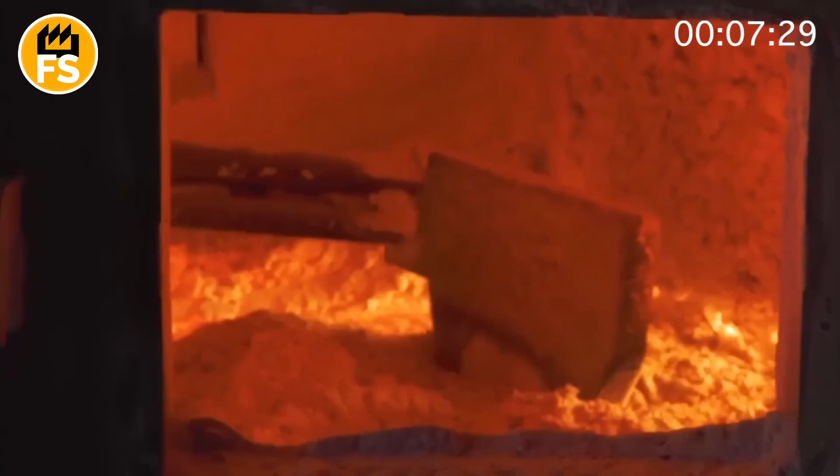When the vapors touch the hot wall of the tube, they deposit and turn into tiny droplets of glass, like dew collecting on leaves in the morning. Gradually, these droplets collect, layer by layer, until a thick layer of glass forms inside the tube. Then this tube is heated even more intensely, and it collapses into a dense, solid rod. And this is our preform.

The preform is placed in a special furnace that heats up very intensely. The temperature inside it reaches approximately 4,700 degrees Fahrenheit. This temperature is so high that the glass becomes soft and starts to melt, like caramel on a stove. When the end of the preform melts, a drop of molten glass begins to drip from it. This drop is very carefully drawn downwards, and a thin thread is formed from it.

This thread, the optical fiber, is drawn at a speed of approximately 1,000 feet per minute. Imagine that. It's faster than a cyclist moving through the city. It's important for the thread to be of uniform thickness throughout its length. The thickness of an optical fiber is usually around 125 microns, or approximately 0.005 inches. That's very, very thin. For comparison, the average human hair is about 100 microns thick or more.

To keep this diameter under control, special instruments are used during the process. They look at the thread in real time and measure its thickness. If the thread starts to become thicker or thinner, the system automatically changes the drawing speed or the furnace temperature to correct it.

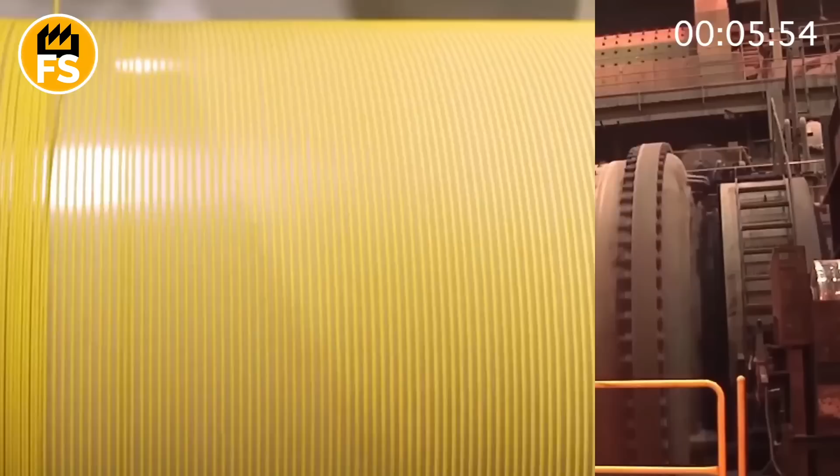After the optical fiber has been drawn from the preform and has become a thin, transparent thread, it needs to be protected. The fiber is very thin and fragile. If left unprotected, it can easily break, cracks will appear, or dirt will get on it. Therefore, immediately after drawing, the fiber is coated with a special protective layer.

A thin thread is pulled from the furnace. After the furnace, the thread immediately goes into a coating machine. This is a special device that clothes the thread in a plastic sheath. The optical fiber enters a special part of the machine called the coating head. It's like a small tube or nozzle.

Inside which there's molten protective material. As the fiber passes through this tube, a layer of liquid polymer is evenly applied to it. The polymer has very low viscosity, so that the coating is thin and even, but dense enough to protect the fiber. This coating layer usually consists of two parts.

The primary coating is a very soft, elastic layer that dampens mechanical shocks and allows the fiber to bend. The secondary coating is harder and more rigid, protecting against external influences, dust, and scratches. These two layers are applied sequentially, one after the other, to provide reliable protection.

After applying the liquid coating, the coated fiber passes through special forming rollers. They regulate the thickness and evenness of the layer, pressing the coating uniformly along the entire length of the fiber. These rollers are very precisely calibrated so that the layer is not too thick or thin.

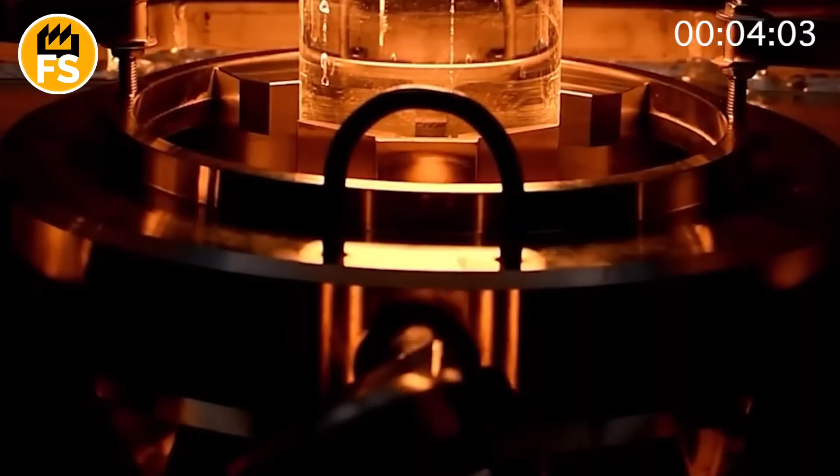After the polymer has been applied and shaped, the fiber passes through a zone of ultraviolet light. Here, the polymer instantly hardens under the influence of ultraviolet lamps. This is a process called polymerization. Anyone who gets their nails done knows how this happens. Ultraviolet lamps emit light of a specific wavelength that activates chemical reactions in the polymer. Thanks to this, the coating quickly becomes solid, while retaining its elasticity and ability to protect the fiber.

This is a very fast process. The coating solidifies in fractions of a second, literally. This method does not heat the fiber, so it doesn't damage it. This provides very strong and durable protection.

The entire machine is equipped with sensors and control systems. They constantly measure the coating thickness, fiber feed speed, and uniformity of application. If the coating layer is too thin or there are defects, the system either stops the process or adjusts the parameters to avoid defects.

At the end of all this technological magic, a spooling module, rotating with a hum resembling the sound of a jet engine, only in miniature. The fiber, like transparent silk, lies down smoothly and precisely, coil after coil. It shimmers in the light of the lamps, reflecting cold blue and white hues.

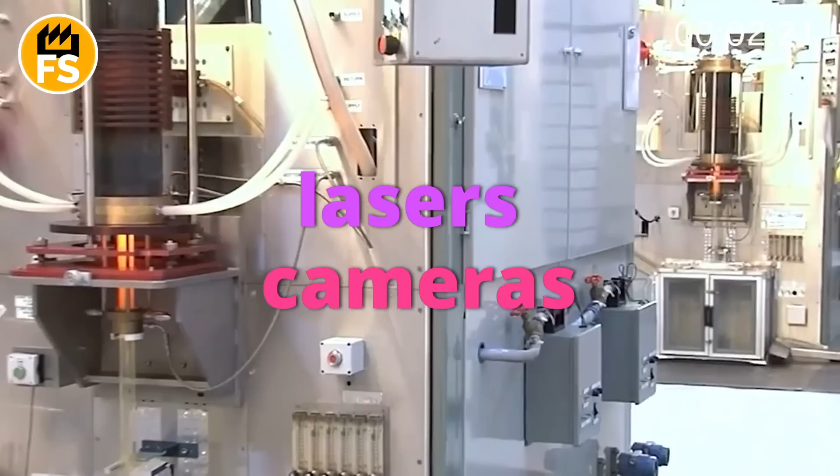The spool moves smoothly, to the left, then to the right, with millimeter precision, as if an artist is painting pictures with movement. One wrong angle, and everything will go haywire, so the system automatically adjusts the rotation speed and fiber tension with surgical precision. Around are sensors, lasers, cameras. They carefully ensure that the fiber lies flat, doesn't twist, and doesn't create tension.

With every minute, more and more layers appear on the spool. Imagine, in a few hours, there are already several kilometers of thin, almost invisible fiber there. And all this, without a single break, without a single scratch. Because even a micro crack, and the light signal will get messed up, like a radio wave in a storm.

Before cable assembly begins, the fiber from the spool is carefully wound onto a production line. Since one cable usually contains several fibers, individual threads are combined into ribbons or modules. For ribbons, the fibers are arranged parallel in a single plane, for example, 12 pieces, and glued together with a special resin. This makes them easier to work with during connection. For bundles, the fibers are twisted into a spiral strand and placed in a plastic tube.

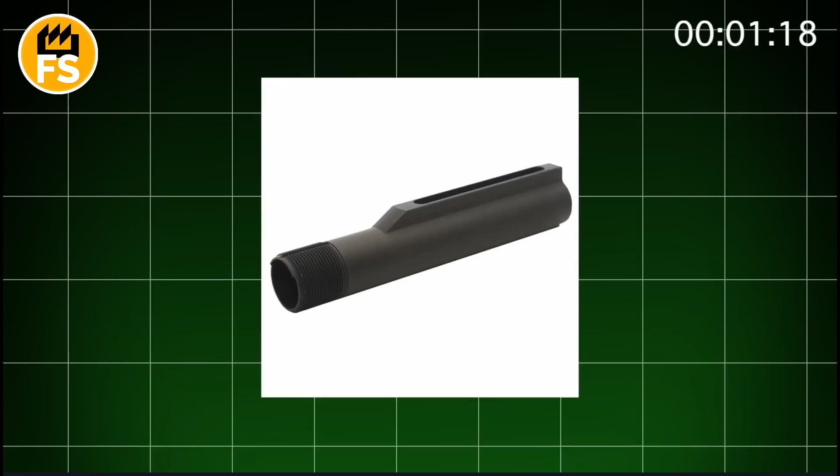These ribbons or bundles are then placed into buffer tubes, thin, flexible plastic channels that provide space for the fiber's slight movements. This is important because when the cable's temperature changes or it's bent, the fiber slightly expands or contracts, and the buffer tube helps prevent it from being damaged. A gel that repels water and absorbs vibrations can also be added inside these tubes.

Around the buffer tubes, strengthening elements are added. Fiberglass or Kevlar, very strong threads that protect the cable from stretching. Metal wire, for additional mechanical strength or grounding. A central strength member, a rigid element in the center that maintains the cable's shape. These reinforcements are needed so the cable can withstand tension, impacts, bending, and remain intact for decades.

All of this is wrapped in an outer jacket. This is a dense plastic or polyethylene pipe resistant to ultraviolet light, moisture, rodents, temperature fluctuations. The cable is tested. The bandwidth of each fiber is checked, as is its bending strength and resistance to moisture. Then it's wound onto large drums, marked, and technical documents are added. And it's ready for transportation and installation.